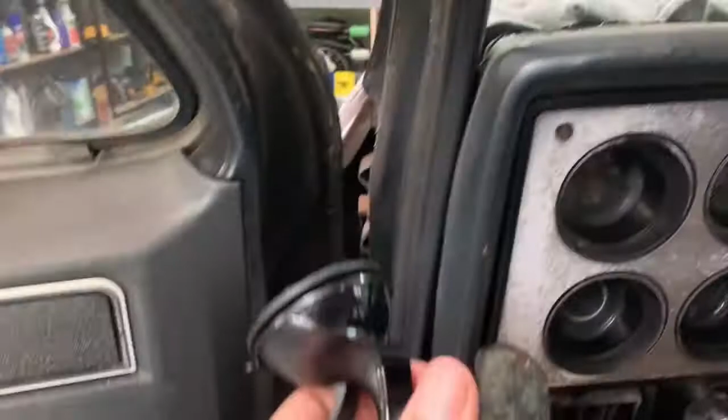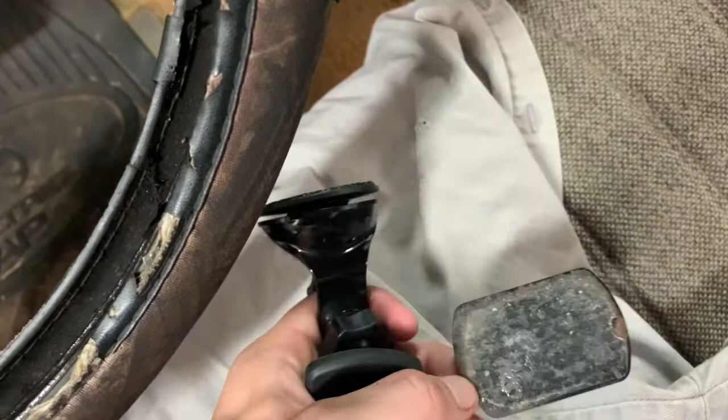So to mount that unit, this is what I'm going to use. It's a suction cup type deal, goes on your window. I used to use it for my phone. Anyway, that's the plate right there, that's what the magnet sticks to. This was stuck to my old phone case and it came off, so I'll get another one, but I can either clean this one off and glue it to the back end of that LCD display, or just get another one and stick it on. But anyway, so...

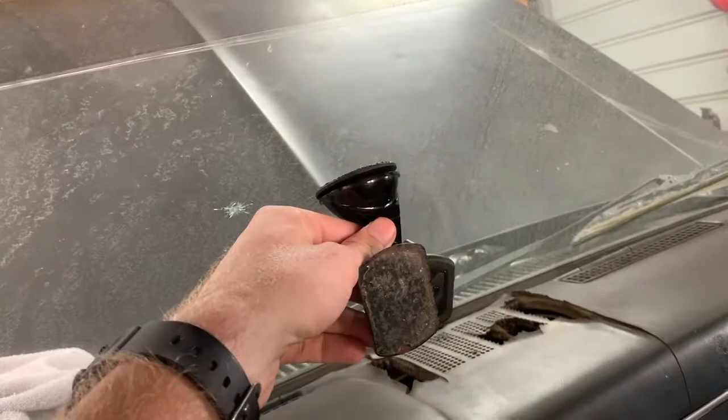It's just magnetic. You mount it right here, or under the rear view, wherever you want to mount it, so it's out of the way of your sight but you can still see it. This is the display, and this is the little case it comes in. What I'll probably do is glue this to the back of this case so that I can slide the display in and out at any time and look at it and put it back in, so that this thing itself is not attached to it. It's probably what I'm gonna do.

I got it turned around this way, it's kept messing my screen up. But that's probably what I'm gonna do, stick that on the back of there and then use this somewhere. I haven't figured out where on the window yet, but I think that'll work pretty well because I used to use it for my phone.

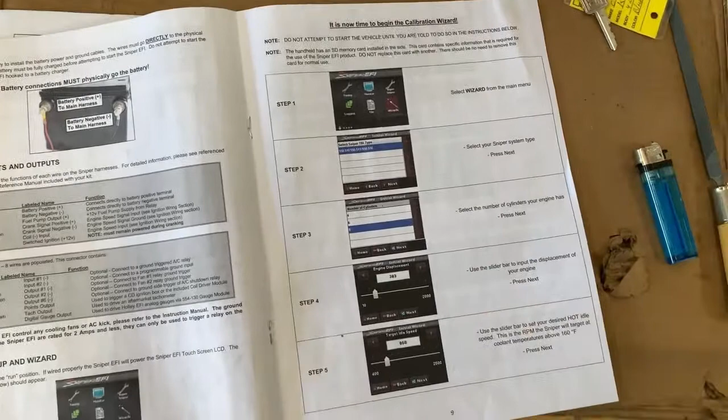So when it comes to that setup, I'm just gonna show you on the paperwork because I already set it up on the actual thing. So instead of going through and showing you the hit and cancel, I'll just show you on here. But you go on here and it looks exactly like that.

And you'll hit wizard when you first turn the key on. You hit wizard, and at that time the fuel pump or anything won't prime because it hasn't set up yet. So then you'll go and select which one you got, which that's the model there if you got this one.

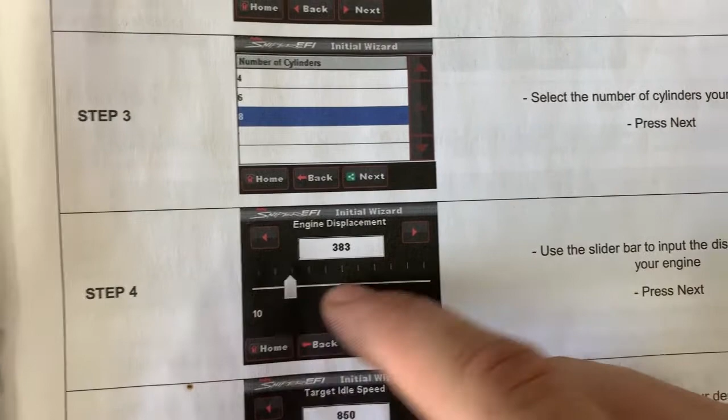Then you select your number of cylinders, obviously 8 for me, it's the 350. This, you can tap that and move it on out, or you can hit the buttons, and it comes with a little stylus too, about that long, and you can use it to tap it right on. And then whatever your idle speed is, set that.

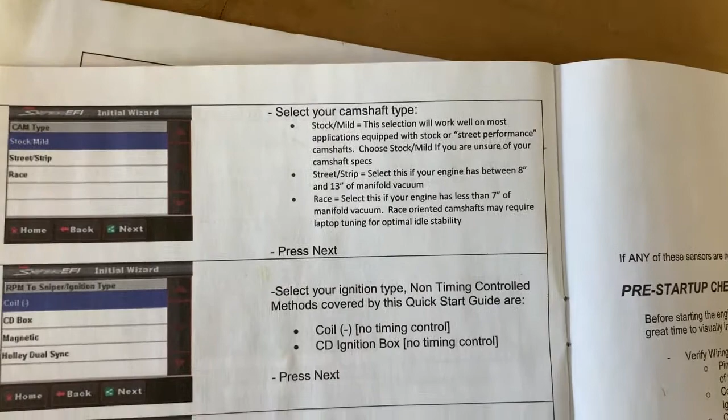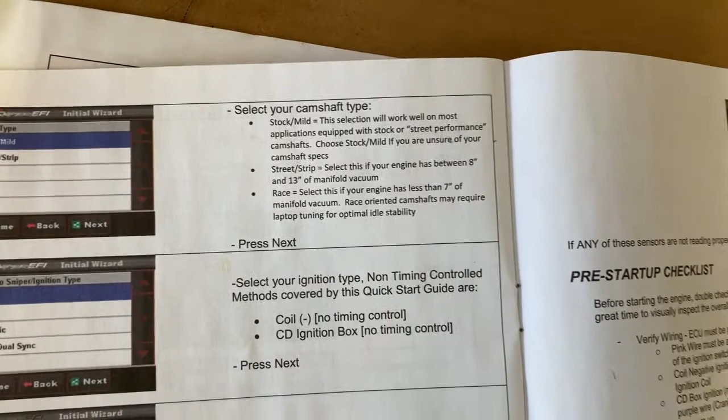Your cam, it tells you on here, let's see, right there, for stock mild, it works for most, obviously stock and mild camshafts. Street strip, it even tells you if your engine is between 8 and 13 inches of vacuum, manifold vacuum, which you can put a vacuum gauge on there. Well, if you already had it running, or if you're putting this on a new engine, you won't know exactly how much vacuum, but whatever your cam specs tell you the vacuum is, I'd probably go off of that. And obviously race, if it's less than 7 inches of manifold vacuum.

I did mild. It said if you're unsure, just hit stock mild, which is what I clicked on. And I got a vacuum gauge, I can check my manifold vacuum, and you can always go back later, but it learns itself anyway.

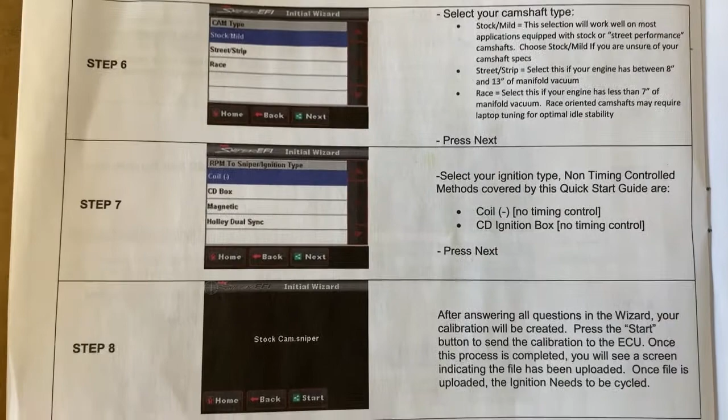So anyway, and then if you're not using the CD box or none of that dual sync, whatever, if you're just using the distributor like I am, you'll select coil negative. Now, of course, if you're using the timing control from Holley, you'll do something different.

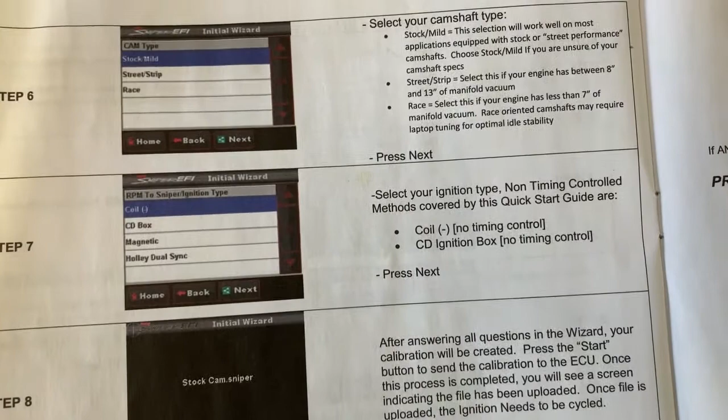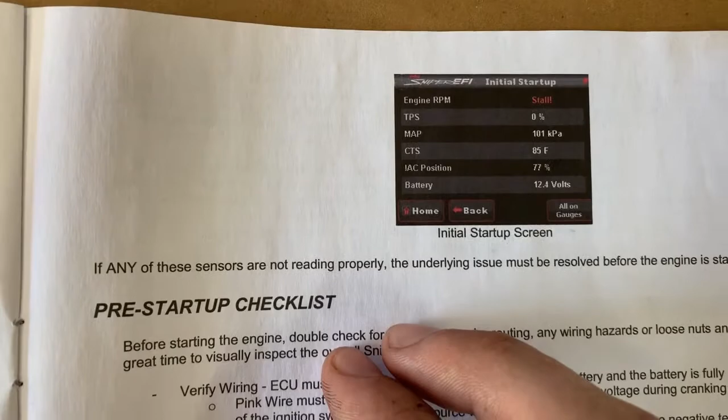And then after that, once you answer all the questions, you hit start, and then it'll say finish, which, okay, that's a different one. It'll say finish, and you hit finish, and you'll cycle the switch, turn it off, turn it back on. But once you hit finish, you'll hear the fuel pump prime, like the computer tells it to cut on, because there's a relay over there for that.

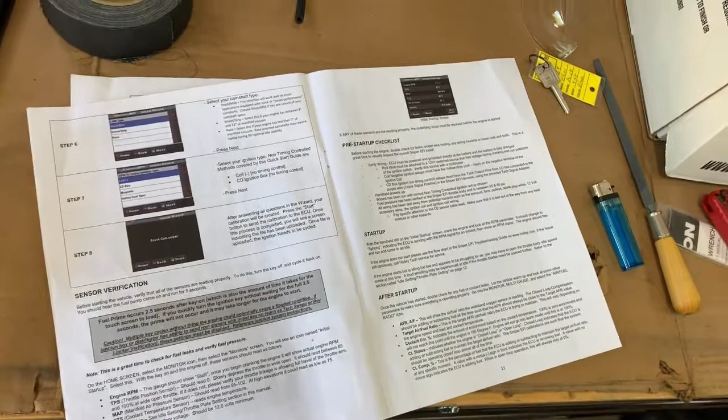So anyway, I'm about to fire it up. I got everything tidied up. Let me show you these clamps I use.

I ordered these off Amazon. They are the LOKMAN cable clamps. It's 3/4 inch, but they're like hose or cable clamps. It's got the rubber insulation on there.

So I took those, and where it comes up from under the frame down there, it runs along. You can't really see because it's kind of dark, but it runs along there on the fender. I'm using those to hold the hose in place, as you can see.

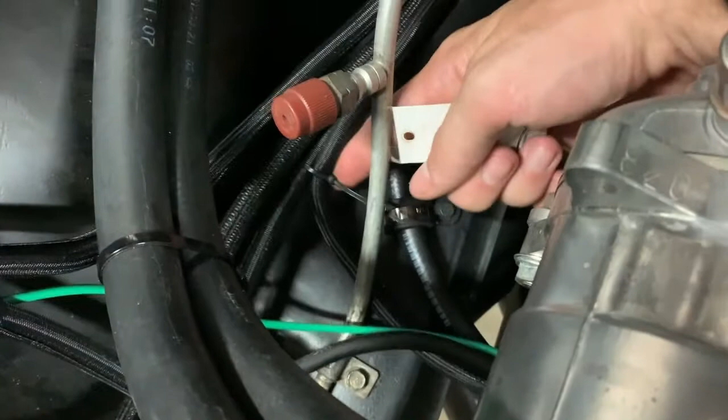Now these, what I did, I drilled and marked where I wanted them, then drilled them, and used those little plastic rivets. I got a box of these from Amazon in different sizes. I use the 1/4 inch rivets so I can take them on and off. You can also use the other ones, and they hold pretty good, but you have to pull them out with pliers or fish skinners, which is what I use. These old catfish skinners work good for pulling those out. But I use these so it's easier to get in and out if I need to, just to hold it in there.

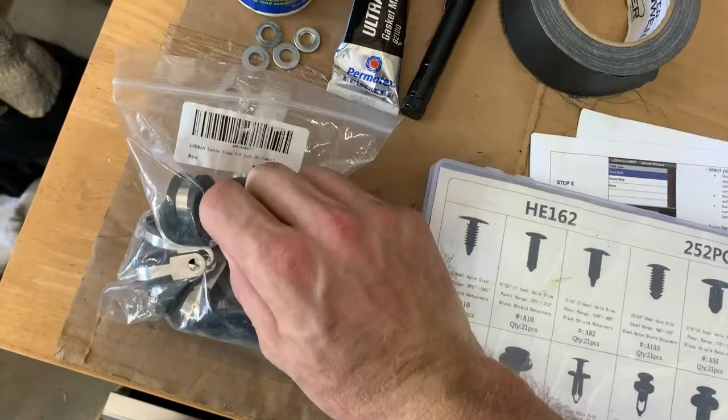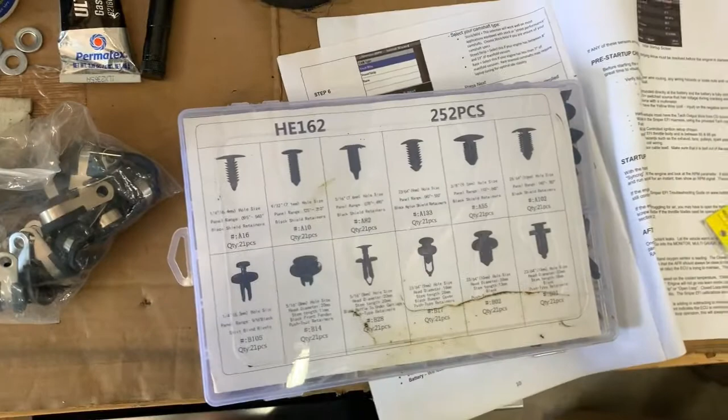Obviously you pop it through these, put that around your hose first, then you squeeze that down and put it through there, and then pop it into the hole that you got drilled in your fender if you're gonna do like I did. That holds pretty good.

So I got my lines ran, finished setting where they're gonna be, and got that wire fixed, and we're all good to go. I actually fired it up already one time because I wanted to make sure it's running and everything before I secured exactly where my fuel lines are gonna be.

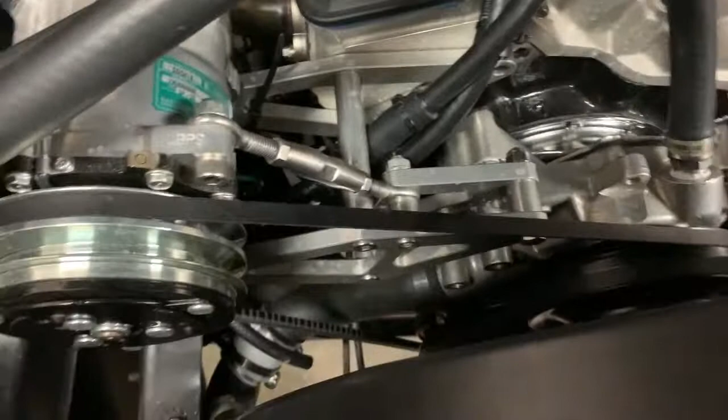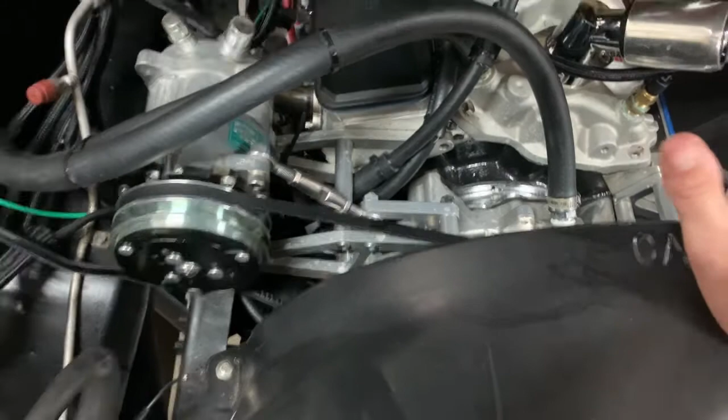A few places here I took some 3/4 or a little smaller heater hose and put it around this fuel line, just where it rubs the engine, and down here where this bolt is on the bracket, just to keep it from rubbing through. It'd take forever to rub through it, but if it did, it'd probably catch on fire. So I wanted a little bit better insurance for that. This one's just overkill because it's just rubbing on the hose, but I put it in there anyway because I had a piece left over.

But everywhere it's rubbing on the block, the brackets, or down there on the frame, I put a little bit of that heater hose around it and zip tied it on. I just split it down the middle with some cutters and then zip tied it on, so it wouldn't rub into anything.

Let me show you one thing I did, which I'm about to fire it up for you. But one thing I'll show you real quick - if you're like me, when you're setting up the fuel system, it may save you a little time.

So to start with, I turned it on, it primed, and I turned the engine over, but it wasn't firing - it wasn't getting fuel. And I know that wire was right and everything is set up just like it's supposed to be. So I got to thinking, and I got under here.

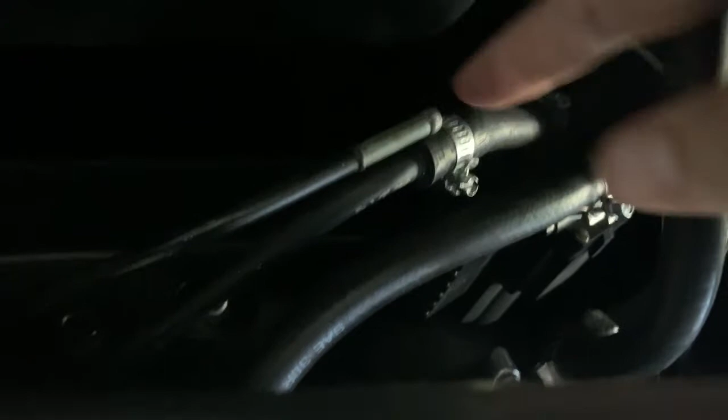This is your little fuel tank splitter thing. If you're like me and you have dual tanks, your setup will look like that with the little valve. So as I mentioned before, this 1/4 inch one is the old return - you don't need that, you can take it out. I just left it in case I ever need it later on in the future.

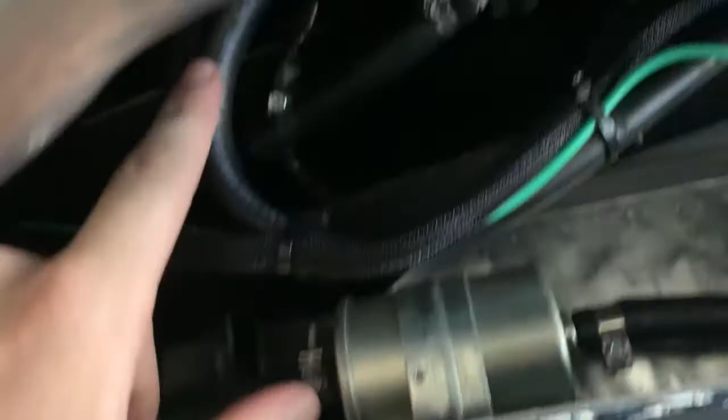The rubber one, coming off the pump, is your supply - I got it routed around there. And then I used the old supply hardline for the return because I didn't have room to run a whole other rubber one, and it works just fine.

But what I had to do is, because it was lined up with this one, I had it right here, and the supply up here, and I got to thinking, wait, it's not getting fuel. Well, duh, I wasn't thinking - I had just put the hose back where it was because it was already there. But I had the supply on the return line, so it wasn't priming, it was sucking air.

So make sure, if you're gonna do this like I did, the top one is your return, the bottom one is your supply. I know it's dark and you can't see - let me see if you can see better. If you're looking at the back of the splitter like this, there's only two right here, because this other one that comes up here is just a vent basically.

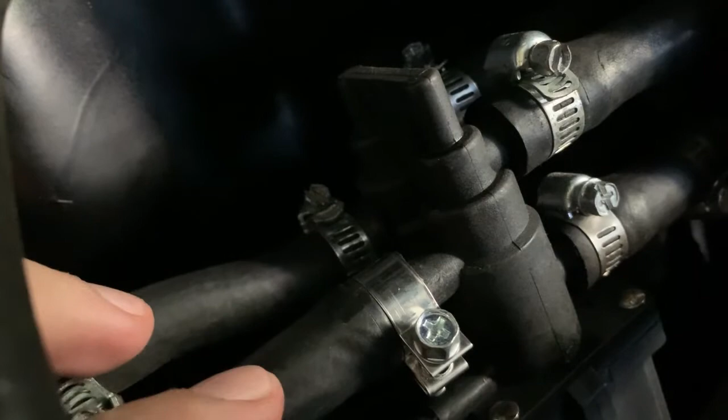On this one, the bottom is your supply for your fuel from your fuel pump, and this top one is your return. So all I had to do was swap this one up - it was right here.

I just spun it up here to connect to the return up there, and after that it primed up and had no issues whatsoever. Now that it's all good to go, I'm gonna fire it up real quick just to let y'all hear it run.

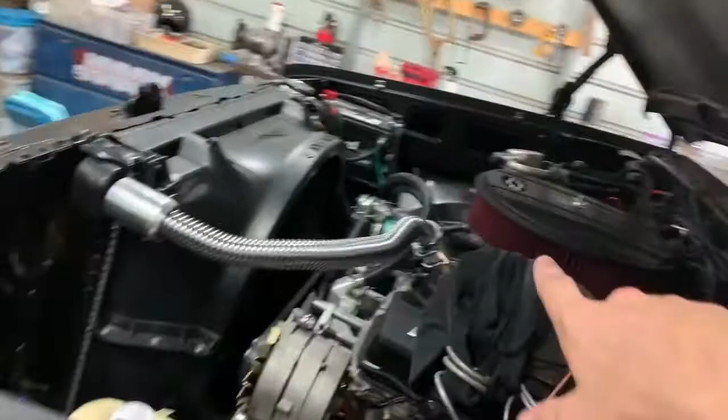So when you first turn the key on, you can hear it prime. It usually doesn't run that long, but it primed that much this time because I had to take the fuel hoses off and shorten them up a little bit where they clamp on there because it had too much slack. So it just reprimed it.

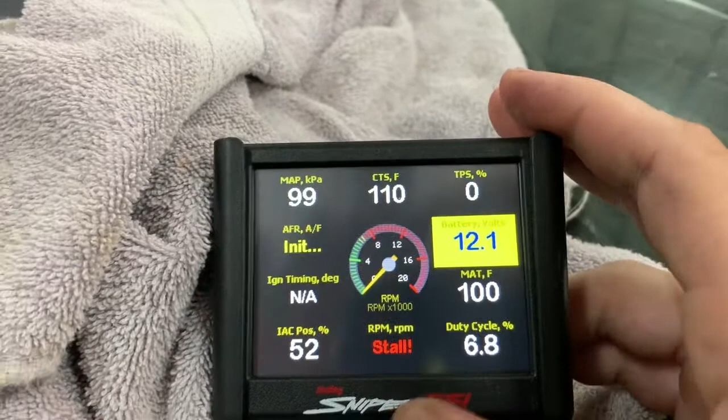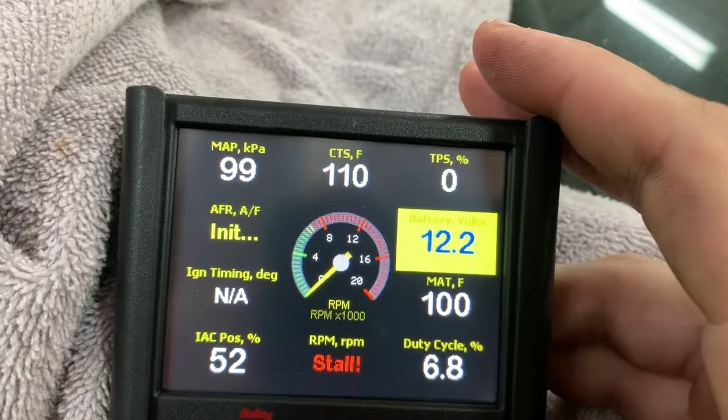Your wizard comes up like that, and I already have it on the vitals. You click on sensors or vitals, whichever one you want to do. Click on one of them, and this pops up, and you can see your RPM, which is stall until you crank it. This is your temperature. I was wondering, like, what the heck is CTS? That's your engine temperature - it has to get up to, was it 210 or not 210, 160, before it starts learning. And then of course your idle air control position and TPS. I'll explain more of that in just a second.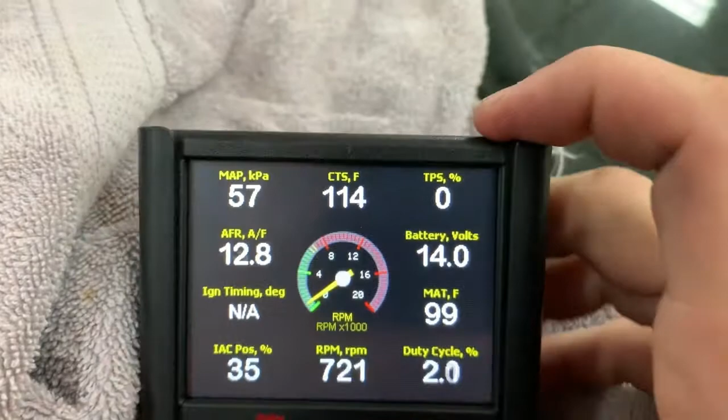Right there, my idle air control is 35, my TPS is 0, and that's my temperature. Normally, when you first prime it up, it fires right up, but like I said, this is my first fire up since I had to take those fuel lines off, so it wasn't quite primed up. But we'll just start it back up again and show you.

Wizard comes on. See, fires right back up.

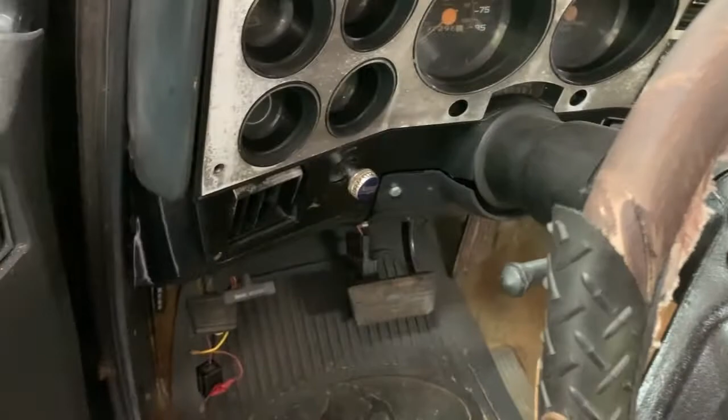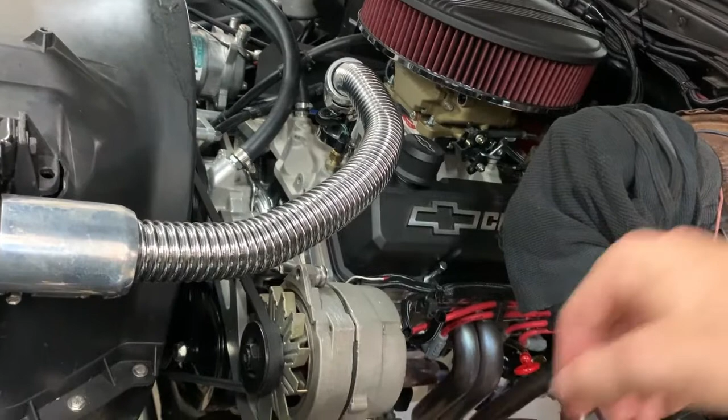Now, one thing, I'll give you my thoughts on this. Before with the carburetor, this is a mild cam, but if you like a lope - now if you got a wilder cam, it wouldn't make much difference. But a couple things I noticed running this Holley sniper setup, it gets rid of a little bit of the lope. It still has a little bit, and you can hear it somewhat. But before, when I had the carburetor, it was just pop, pop, pop, pop, pop, you know, the sound, and it sounded great. I put this on there, it holds more consistent as far as the air fuel ratio and all that. It's computerized, so it got rid of a little bit of the lope, which is disappointing to me.

But there's no choking - that's the negatives, but on the positive side, there's no choking. You don't have to choke it to fire it up, you don't have to tap the gas a couple times, none of that. You just turn the key over, let it prime, and fire it right up. Tomorrow when I come down here, it'd fire right up on the first lick because, like I said, it hadn't ran since I took the fuel lines off.

But anyway, it'll fire right up. The throttle response - I've took it for a drive, and the throttle response is a little better. Yeah, you can tune the carburetor perfectly, but I don't know, this one's still a little better. I like old school stuff, I like a carburetor too, but I wanted to try this, and personally I like this a little bit. Other than the lope of the engine when it's running - I like that a little bit better with the carburetor - but everything else so far, I like this.

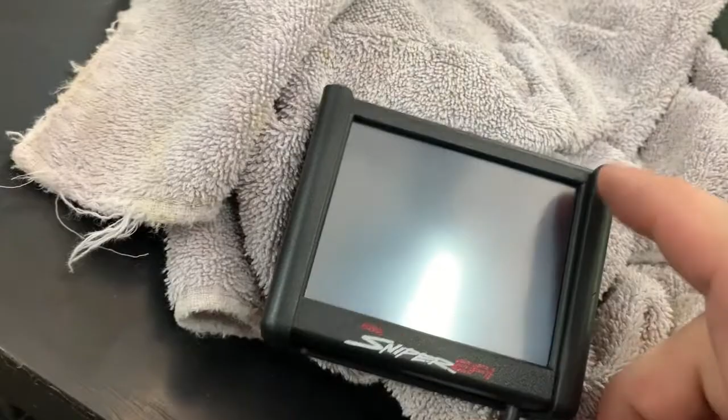One other thing that's a little tricky with this is setting the idle air control. It explains it to you in the book, but you'll go on here, and the idle air control is down here, IAC position, and the TPS percentage up here. It tells you, which is not on there, but I'm just telling you about where it's at - it tells you to adjust your screw. You have to take this off, your air cleaner, but right over there on the side there's a throttle. Let me see - back there, I'm not gonna take it off to show you now, but you'll see it.

There's a screw on the side right here. If you know anything, it's kind of like a carburetor - there's your throttle, your idle screw. So it tells you, you can't do it before your engine gets warmed up. Once it gets up to temperature, then you adjust it. You run it in or out, whatever, you get your idle air control, which is your IAC percentage between 2 and 10%. So aim somewhere in the middle or whatever, but anywhere in that range.

But your TPS has to be at 0%. If your TPS goes above 0 to 1, 2, whatever percent, you recycle this switch, turn it, crank it back up, and start adjusting it again. That is number one. Those are the two most aggravating things.

With a milder cam some of the lope's gone, but messing with the idle, it's kind of hard to get right, they're finicky. I finally got it where it was reading about 2 or whatever, and it'd go up, stay around 5 or 6, then slowly go back down and hit 1 or 2, maybe hit 0 and go back to 2.

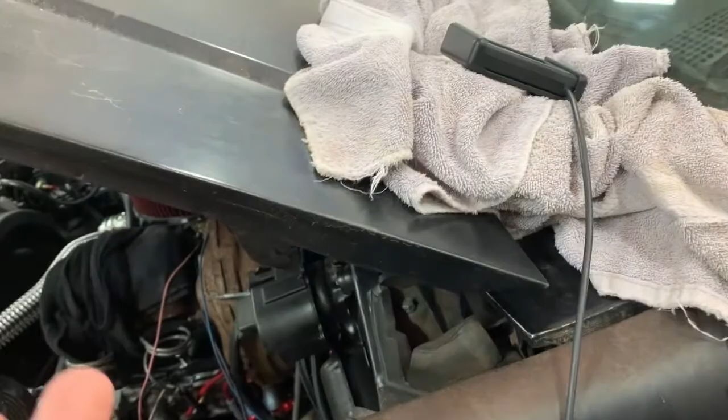But you can run it whatever you want to, change it on your computer. On this one, you don't have to do the whole thing again. There's a spot for tuning - you hit tuning, hit basic, and you can adjust your idle speed, target idle speed. But then you've got to come back and mess with the screw a little bit, because it tells you your RPM on there, and get it exactly about where your target is, and make sure your percent is right.

That's my biggest complaint on this whole thing so far, is the dang idle air control.

Okay, make sure - I had some brake fluid leaking. That's why this rag's over it, but I'm trying to make sure it wasn't coming down. I've got a whole setup to change that out, which will be another video.

But anyway, that's the one aggravating thing, is messing with your idle air control. Once you get it figured out, I guess it'll be okay, maybe you don't have to adjust it anymore. But that's my biggest complaint about this system. Everything else so far, I don't really have many complaints about other than that.

And to start with, you're gonna have to fiddle with a carburetor when you first get it tuned in anyway, and then probably more in the future later on, especially before it needs rebuilding. But I don't really have any complaints other than that, and that's not even really a complaint, it's just a step you gotta do to make sure it runs right.

The only thing I got left to do is run through the firewall to mount the unit somewhere. Other than that, that's all I got left. I'm not gonna bore y'all with showing y'all that.

So that'll pretty much wrap up this video. If you have a truck like this and you're gonna do exactly how I did it, it'll take you probably a good weekend to get it set up.